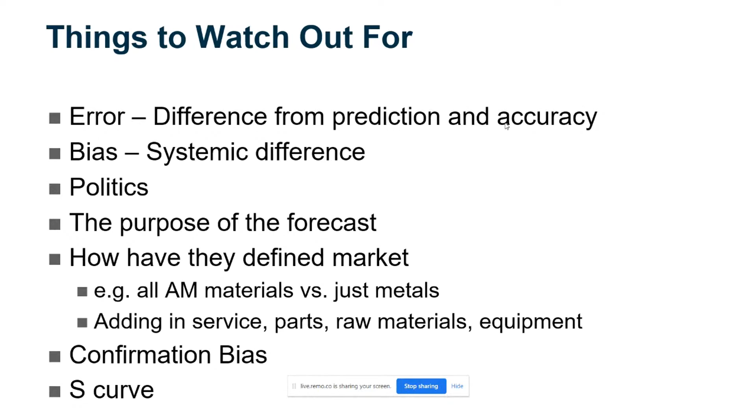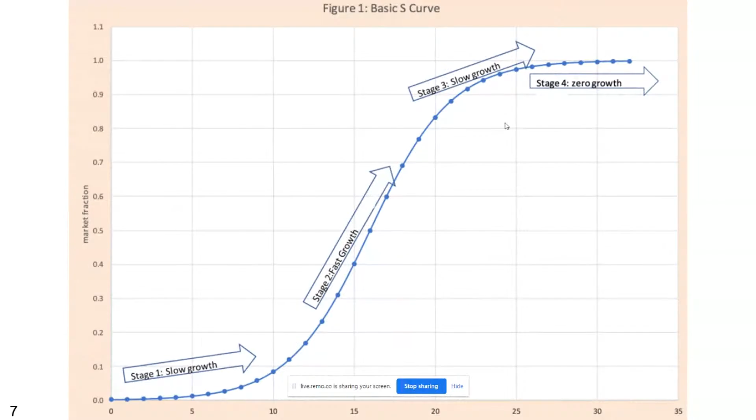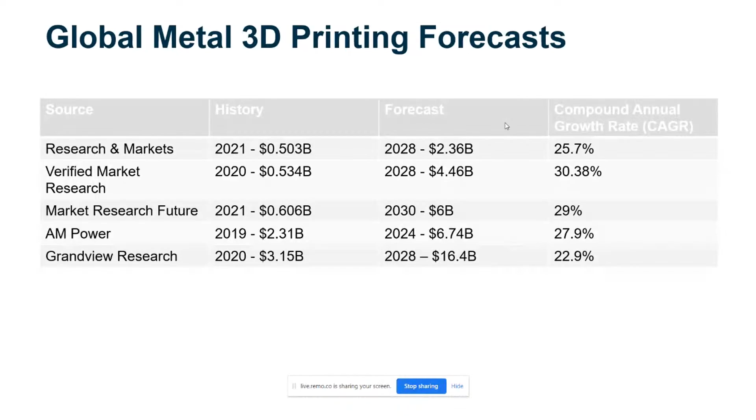Now, I saw a quote last year that said if metal additive manufacturing could achieve $5 a kilogram, then it would be a $100 billion market. Now, on one hand, that seems like an incredibly huge increase compared to the forecast that I just showed you. But on the other hand, it seems reasonable because that gets the price down below machining and in the neighborhood of formative processes such as stamping, casting, and other mass-produced parts. But that's a big if, getting down to $5 a kilogram, or for those of us in the US, $2.27 per pound.

Now, for the prior 3D printing forecast, it's not clear. What are they assuming? What's the basis for their forecast going out 7, 8 years? Are they assuming an improvement in technology from the current state? Are they assuming big drops in costs from the materials and equipment point of view? And my guess is probably in a lot of cases. If they just expect metal AM to win market share, it's really not clear where they're expecting it to come from.

But in some cases, they may just be extrapolating past growth trends into the future. So I want to try to go through some costs, analyze the costs of the current state, and analyze where we would need to go to get down to that $2 a pound goal.

So this is some basic costing assumptions. It's going to be very basic math. Hopefully it's not too boring, but I'm going to go through this pretty quickly with a generic part. So if we look at powder bed fusion, and these are my assumptions, and you might disagree with them, and that's okay. You can redo this analysis and make different assumptions with your own numbers if you want.

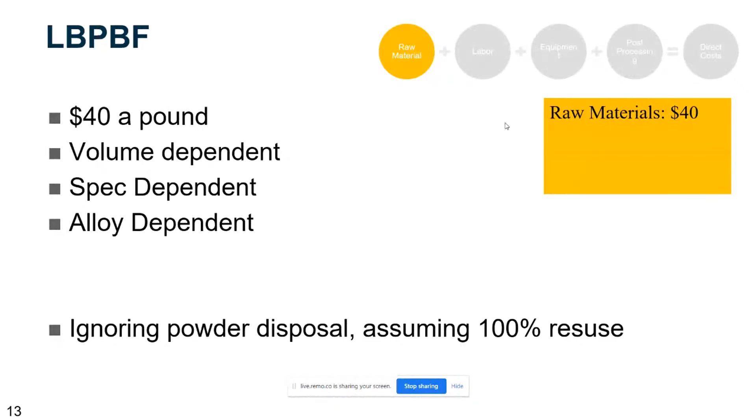But I'm going to assume aluminum, and what we're going to start with is a reasonable powder cost. Now, obviously, powder costs can really vary depending on your assumptions, but I've picked $40 a pound, which right there we have an issue if the total cost of the part is desired to be around $2 a pound. Now, if we look at labor, if we assume $15 an hour and a reasonable 50% is going to various benefits and taxes, that gives you an employee cost of $22.50 an hour.

Now, these machines print relatively slow, let's assume about a cubic inch per hour. And based on the density of aluminum, we can calculate that you're going to need 10 hours to get a 1 pound part. So we know these machines are automated, and the person doesn't necessarily have to stand there the whole time. But I make the assumption that for this 10 hours you're going to need 30 minutes of labor, or $11.25.

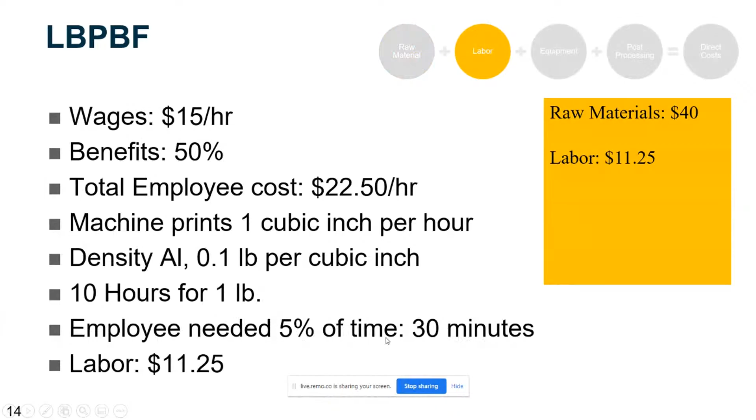Similar analysis can be done with how much the time for the machine is going to cost. So, machine prices can be all over the place, but if we assume $100,000 and we divide this by 10 years for straight line depreciation, and we're running this 24/7, you can get a cost to operate a machine per hour. In this case, $1.14, and if it's again 10 hours to print a pound, then right there the equipment cost is going to be $11.40.

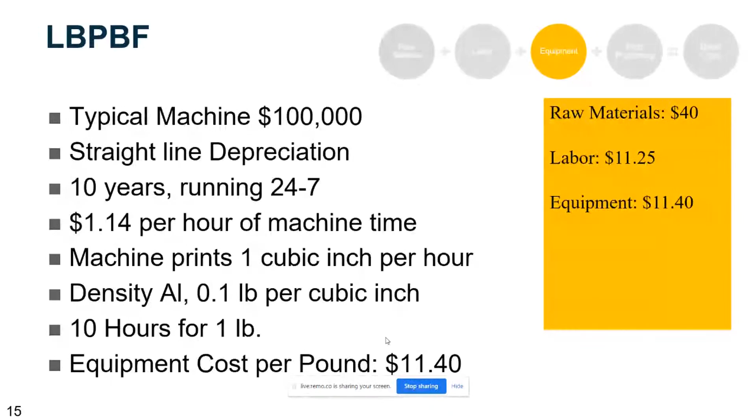Now, for comparison with some of the mass production rates, this is less of an issue. For instance, I got an aluminum melt furnace quote recently, which is $90,000. But the difference is that equipment makes 1 ton an hour of material. So doing the same analysis, it actually gets you a cost of 5 cents for the machine for 100 pounds of material. So it's pretty negligible in that case. But for 3D printing, the depreciation of the machines is a big deal.

Next, we have post-processing. So those can be all over the place. But if I assume that we're going to ignore heat treating and basically just look at support removal and the machining that's needed, in this case I just decided to assume 10% was a reasonable amount for machining. Just adding up these basic costs, the total cost is about $70, or above 30 times our target goal here.

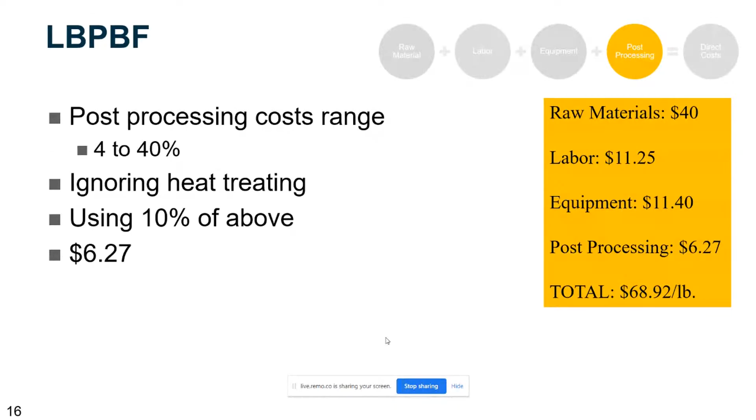So if I do the same kind of analysis with binder jetting, again, it has raw material costs. Now, in this case, they're a little bit cheaper, and binder jetting does have a somewhat higher production rate, so it's going to take less labor to go into this. It produces more pounds per hour. That part of it is actually directionally correct in getting the labor and the raw material costs down.

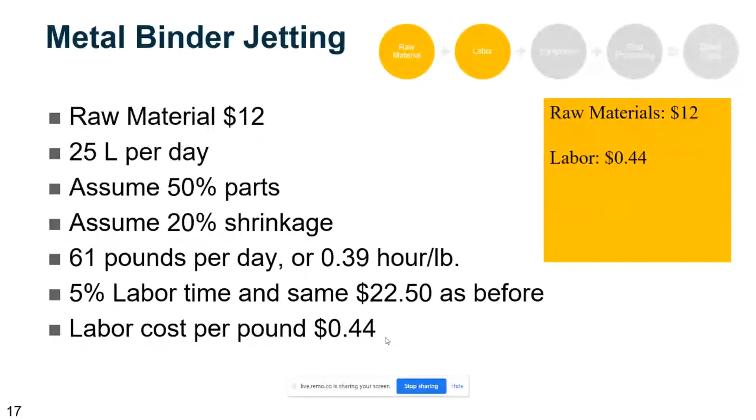However, we run into a different issue in that binder jetting tends to have much more expensive equipment. There's multiple pieces of equipment needed, such as for sintering as well. And I'm told that these typically run about $1 million. So if we're going to do the same kind of straight line depreciation for 10 years, that actually gets us to $11.42 an hour, or $4.45 per pound.

I know that thinking about things on a per pound basis is not the most common thing, but if you depreciate faster, you'd actually have this per pound cost go up. But on the other hand, maybe you can ramp up your production rates to make it go down somewhat. But still, you're already well above this target.

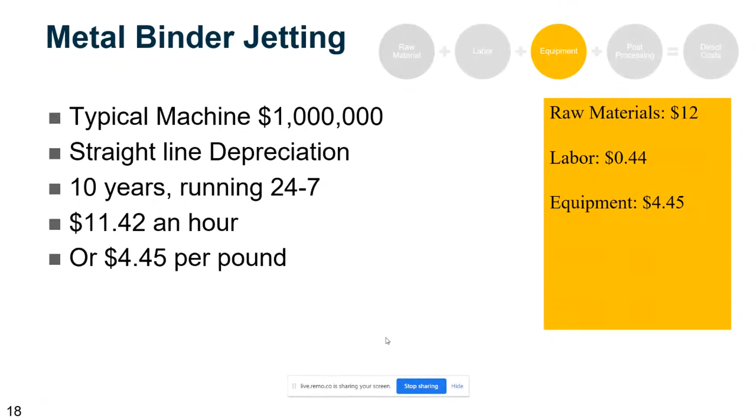Now, post-processing in metal binder jetting is a little bit less because they don't typically require support material unless they're trying to deal with any kind of sagging during sintering. And it is a fairly accurate process, but I'm going to assume in this case 4% cost for post-processing.

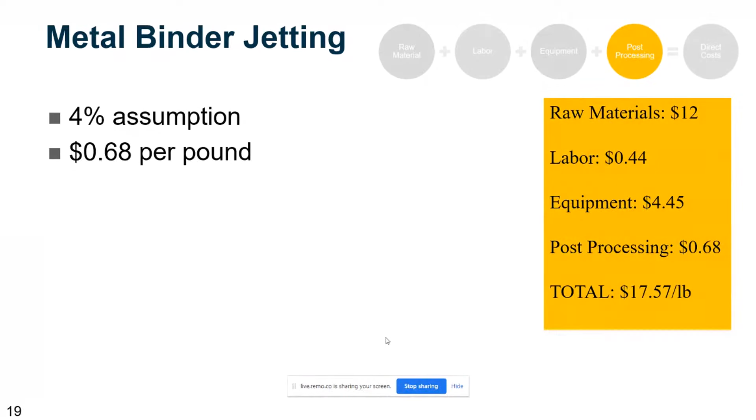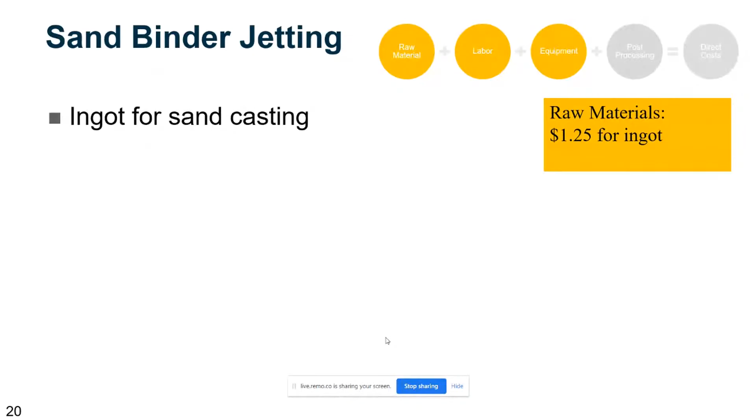So 1757 is my rosy scenario assumption here, and it's still a fairly long way from the target, but it is better. Next, people might have asked me about sand printing because casting is considerably cheaper. So in that case, if you just are going to look at the ingot metal costs, yeah, that is cheaper, $1.25. The problem is that when you print for sand, you actually have to print a good bit bigger part than the space you want.

So if you want a part that's a very simple rectangular prism, 1 by 2 by 5, you actually have to print a mold that's substantially bigger, and that actually means you have to print, in this example, 260 cubic inches of sand. So even at a very cheap 7 cents per cubic inch, which I believe includes the labor and equipment and margin in there, that actually gets you $18.20. So right there, again, it's gotten way beyond what the target is.

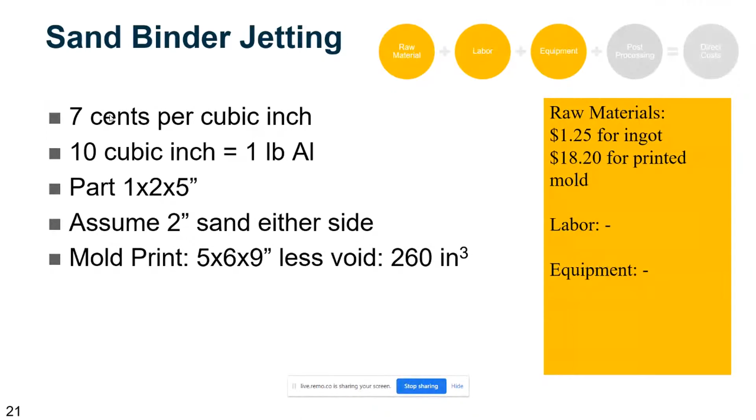I need to add in this analysis some labor for the foundry itself, as well as the other issue with sand printing is tolerance control. So coming from a foundry background, sand casting actually has pretty poor tolerances. The molds tend to erode. Silica sand undergoes a phase change at high temperatures, which causes them to have tolerances that vary about 3%. So most sand castings get a lot of machining.

One example, a foundry part I looked at recently started at 5 pounds, and they actually remove 1.5, or about 30% of the weight. And that gives 2 problems. So basically, first, there's the machining cost itself. And then second, you're throwing away metal, which means you have a certain set cost, and you're actually dividing it by less weight for the final finished part. So in this case, I assume 20% post-processing costs. So again, the total cost in this analysis, $24.34 a pound, or about 10 times above the target.

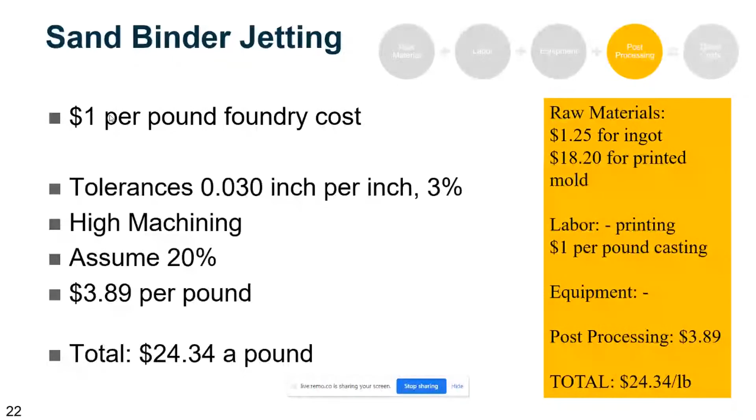So if we're trying to get down to below $2 a pound, so far, are you depressed yet? I actually consider some of these to be kind of rosy assumptions, and we're still an order of magnitude away, and this is just for costs. So something to point out, costs are what you pay for something, but price is what you sell something for. And customers, they're looking at your price, considering it their cost. So none of this includes a whole host of other costs of being in business, let alone profit.

So how do we get the cost out of this? Is this $2 a pound goal even possible? So some approaches to lowering costs fall in one or more of the following categories. So there is a bit of a problem here. Some of these, if you positively impact one, then the others get negatively impacted. For example, faster print rates, that can be done with more lasers, but that tends to negatively impact the cost of the equipment. And the same thing with labor. If you want to add automation and have less labor, well, that again will increase the equipment costs.

The approach I do commonly see with the engineers in additive is having clever designs to help drive down the cost, whether this is lattices or printing in certain orientations. There are all kinds of things being done in the additive manufacturing world to try to get the cost down through clever designs.

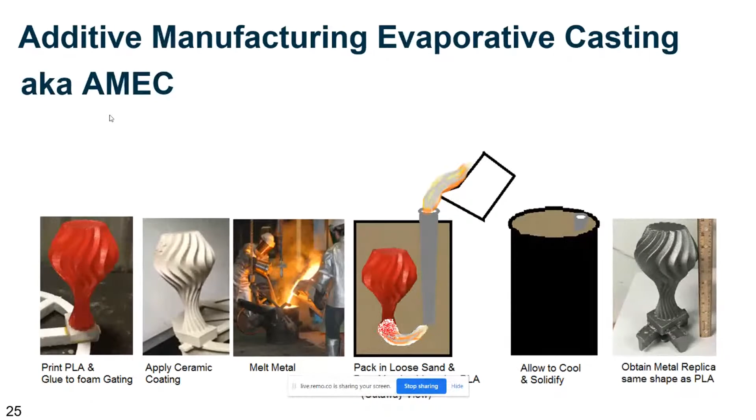And how does this approach compare? So for raw materials in this case, we are actually, again, using the foundry ingot prices, $1.25 as I previously mentioned for aluminum. And then we 3D print using basic FDM polymer filament. So that's pretty affordable for raw materials. Next, we use minimal infill, so it takes less time to print.

And then we use much cheaper desktop printers, which have a pretty trivial amortized rate on a per pound basis, as well as if you need to speed things up, you can just get a wall of printers like some places do. And finally, from a post-processing standpoint, this process is based on lost foam casting. So it's about 0.3% accurate and needs much less machining. Now, the labor on this does need some work. Right now, this is a medium TRL process, and it's not quite yet ready for being in high production.

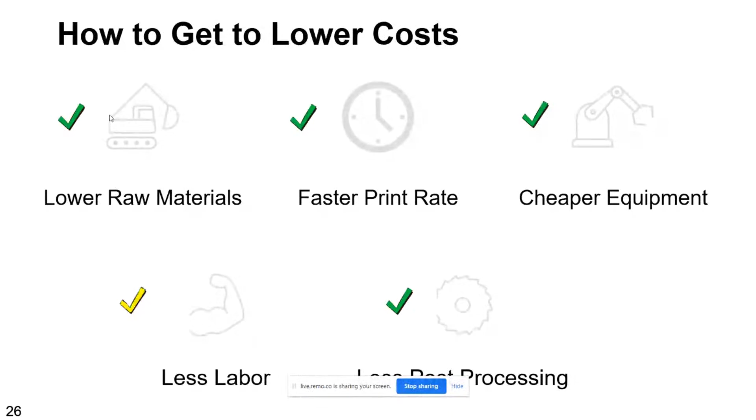But at some point, it would be possible to get this more automated. Right now, it requires about the same amount of labor whether we're making a 1 pound part or a 40 pound part. But looking at these assumptions, and similar to the assumptions before, we actually can get a similar kind of costing for AMEC.

And in this case, as I said, the raw materials are much less. The labor, and I did this analysis assuming a larger part so we could actually get the labor down. Otherwise, the labor would be much higher if we were looking at a 1 pound part. The equipment is very negligible, and post-processing has been scaled down to be similar to the above rates. So again, $3 per pound is not quite there yet, but it is definitely getting closer. And I think that in this process, if we weren't looking at aluminum, if we were looking at something like A36 steel, you can take out a good bit of the cost from the ingot prices.

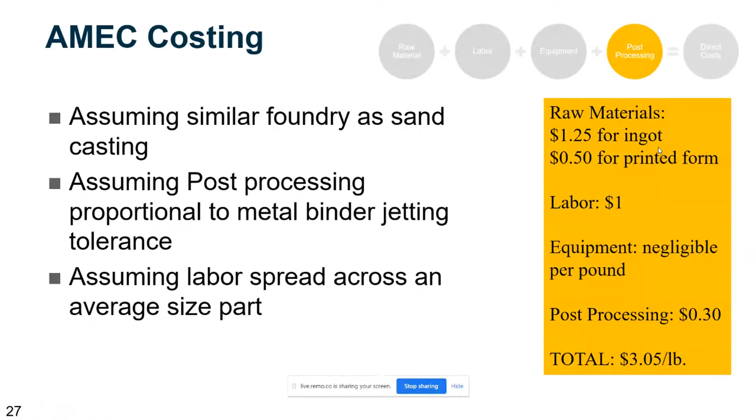So to wrap up my talk, I want to give you some predictions on where I see the additive market going. I actually think that the market is bigger than even some of the most optimistic forecasters think. I think that $2 per pound is really not crazy. But of course, sales price depends on value, not cost. And people will try to charge as much as they possibly can to sell parts. I mean, that makes sense, right?

I think that the implications of metal AM dropping to a point where it's competitive on price with traditional manufacturing are huge. The amount of things that can be customized will go up a lot. But this will have a headwind in that the impact of those non-recurring engineering costs will become something that matters. And I've really totally ignored that in all of this analysis here.

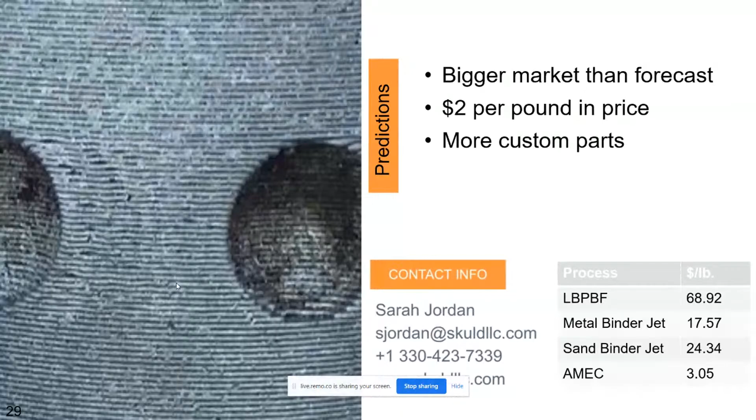Finally, right now, in a lot of cases people use AM for prototypes or very, very small volumes. But I think that the point of justifying tooling is going to shift towards higher numbers. We think somewhere between 5,000 and 10,000 pieces. Above that, tooling would probably make sense. Below that, maybe it doesn't. Of course, this is going to depend on if you're using additive manufacturing to make part designs that aren't possible by other means, in which case you will not necessarily make tooling at all.

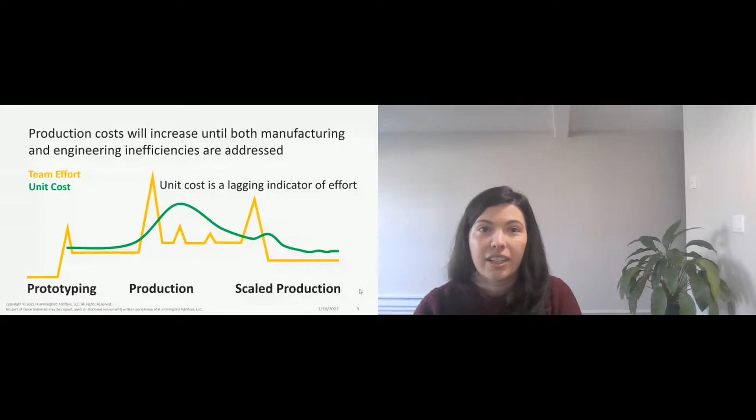When you overlay cost, you'll see that cost is a lagging indicator of effort. So your production costs will increase until both your manufacturing and engineering inefficiencies are addressed. There are 4 key decision points throughout this production lifecycle that we'll talk about today. We have building prototypes, starting qualification, beginning production, and ramping up production. And we'll talk about the different questions you'll need to answer before you can proceed through each of the 4 gates. So let's start by looking at prototyping.

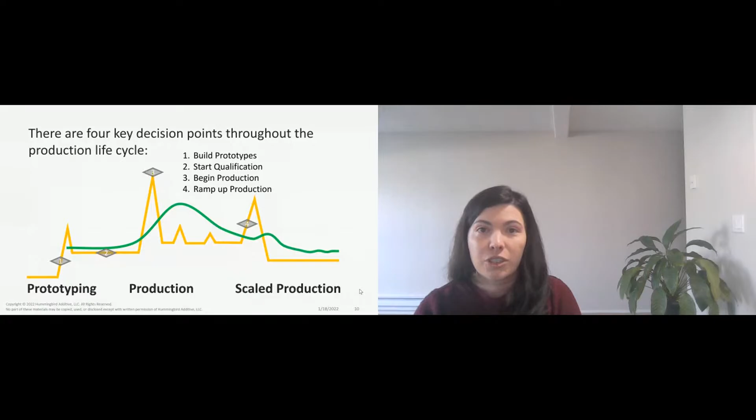Before you can pass through the gate to begin prototyping, you're going to need to answer a variety of questions from both your executives and your engineers. Keep in mind that executives want project definition, and they'll ask questions like, what is the cost benefit? Can we make a business case? And what level of investment is needed?

Engineers are focused on product definition. So they'll ask questions like, how does AM compare to our current manufacturing method? What are the realistic feature tolerances? And what is the expected performance benefit? Once you've answered all of these questions, and both sets are important, we'll be able to proceed through the first gate and start building prototypes.

So once we have the funding, we'll be able to develop our requirements. These will cover the form, fit, and function for our product. Once those are defined, we'll build, test, and iterate. And we'll continue to build, test, and iterate until we have test results that show that our performance meets our requirements.

When you're prototyping, be aware that rarely are legacy designs AM ready. You might even have inherited a legacy design that doesn't have a CAD model. So wherever that legacy design begins, you'll need to update it so that it is compatible with additive manufacturing. Keep in mind that your production unit price might be higher than your prototyping unit price due to the different quality requirements that you'll need to add.

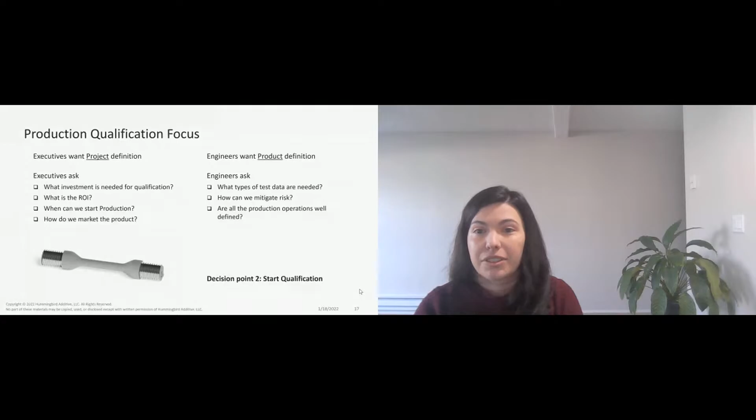So once you have the funding for qualification, you can create an initial procedure and your quality control documents. This is where you'll be spending the time to validate your technical capabilities by building qual units and test specimens. Once you have all of that data and you've analyzed it, you'll be able to go back and finalize your requirements and your procedures. You'll pay special attention to identifying key product features and metrics, as well as establish your inspection and pass-fail criteria that you'll use during production.

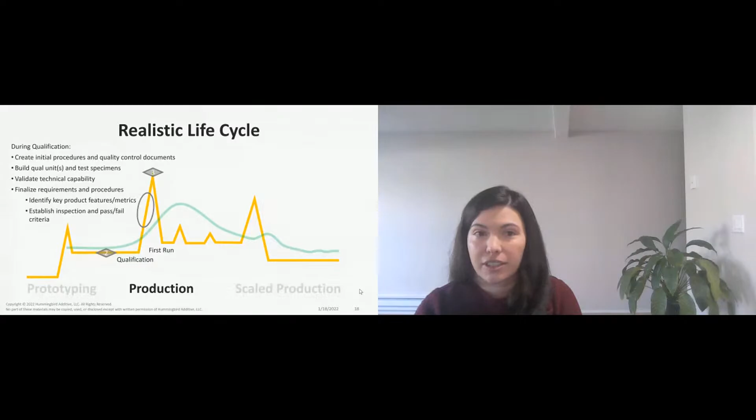During this phase, you'll also start to build trust with your stakeholders and your key customers regarding the product's quality and performance. And since we know that unit cost is a lagging indicator of effort, we're going to keep our eye on that unit cost because it will be rising as we add quality requirements. By taking the feedback from your stakeholders and key customers, as well as knowing that your unit cost will rise, you'll be able to go back and validate your final business case and technical case and send it out for approval.

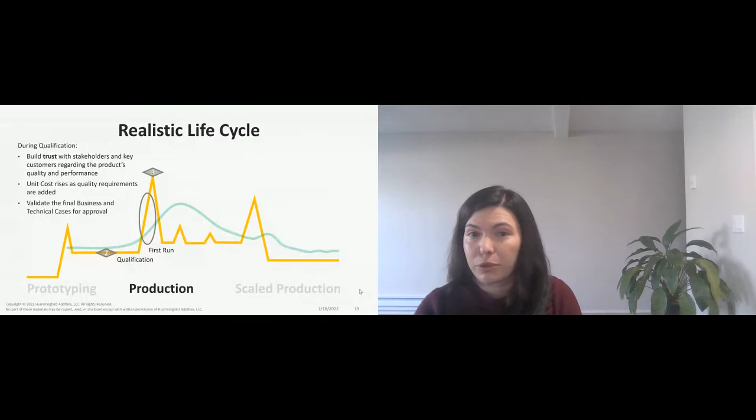But before it can be approved, we'll have a few more questions to answer. Executives, again, want more project definition. So they'll remember that they asked you ROI targets back at the beginning before you started qualification. Now they'll want to know, did you hit those targets? Will this product hit all of our ROI targets? And then how have the risks been mitigated? And finally, when can the production rollout begin? They're again going to be focused to make sure that you have a market ready and waiting for this product as soon as it's ready to begin production.

Engineers will want product definition. So does this product meet its performance requirements over lifetime? What is the unit cost and lead time? And what is our expected production yield? Once you've answered all of these questions, then you'll be ready to begin production.

So now that we've entered production and you're in your first run, you'll see that the unit cost is increasing again because production's an evolving process. You'll probably find some additional requirements that need to be added. They only find out kind of when you're in the thick of it. Your unit cost will actually peak probably around your second or third run. This is after you've stopped adding additional requirements, so those are all locked down.

And then you have found and identified the manufacturing inefficiencies. And perhaps you've taken into account previous underestimates and have everything more clearly identified now. You'll see that in your subsequent builds. This is where you can iron out those workflow inefficiencies that you identified. And as you do, the unit cost decreases accordingly. When in production, be aware that it's an ever-evolving process. You might have changes in personnel or a new vendor that you have to work with, and throughout this whole process, you'll be incorporating your lessons learned.

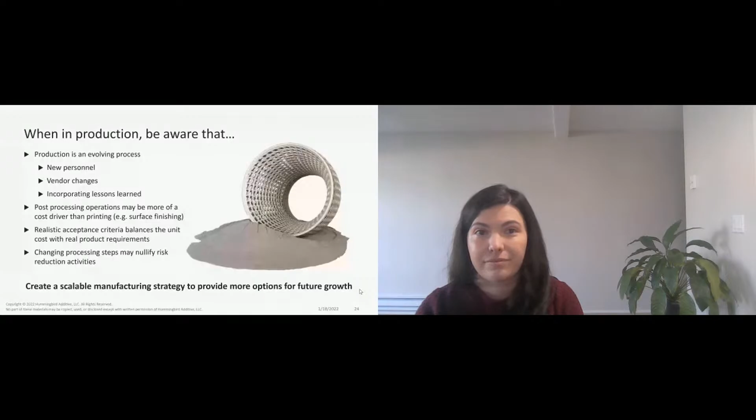Throughout production, if you're making changes and incorporating lessons learned, keep in mind that any changes that you make to your processing steps might nullify previous risk reduction activities. So just keep that in mind. You might need to do some additional testing before you make some changes. At this point, if you're able to create a scalable manufacturing strategy that you can use and test out during production, that will provide you with many more options for future growth. So next, let's look at scaled production.

So before we can reach scaled production, we have trade studies to do. We'll need to decide exactly how we want to scale production, because there are several different options. We'll evaluate the benefits of using a larger AM system versus adding additional systems that are similar to the one we're already using. Once we've done those trade studies, we'll also be scrutinizing our workflow, and we'll see what areas we can standardize and streamline so that we can address our bottlenecks from printing all the way through post-processing.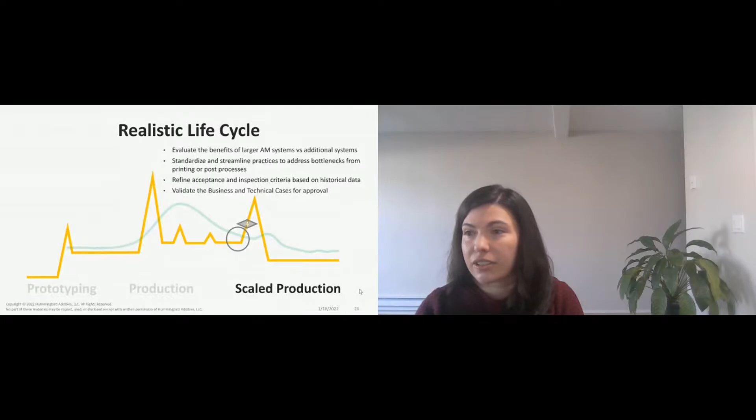Here we'll refine our acceptance and inspection criteria based on historical data, keep in what helps, and remove any unnecessary steps. And then we'll wrap all of that up and create an updated business and technical case for approval. Before we can scale, we again have a few more questions we're going to need to answer. Executives are going to want to know what the market projections are and the ROI for scaling production, what investment is needed, and then again, that forward-looking statement, when will the additional capacity be online? They'll always be keeping an eye on the future to make sure that they have a large enough market ready and waiting for the capacity as soon as you have it online.

Engineers will be product-focused, and they'll ask, what's the impact of moving to a larger system? How can we improve our production yield? What effort is needed to validate the new systems and our facilities? And what further risk mitigation activities are needed? Once you have all of these questions answered, you'll be able to go through the fourth gate and start scaling production.

Now, once you start scaling, you'll be qualifying either new equipment or qualifying new facilities. Either route you go, you'll be taking that test data and verifying it against the benchmark data that you've gathered during production. You want to make sure that your quality in scaled production meets the same level of quality that you had during production. You'll notice that again, since cost is a lagging indicator, you'll get a bit of a bump in your unit cost.

So if we look at the solid green line, this is a lower increase in unit cost because in this instance, we went with adding more machines and more personnel, but not changing the facility. So we already have staff that have learned those lessons throughout production with us. The second option is if we decided to bring a new facility online, and they have a bit more of a steep learning curve to catch up with all that we've been learning throughout production. So you'll have a higher spike in your unit costs represented by the dashed green line, but you'll see again that that will start decreasing and they'll both come back down to steady state.